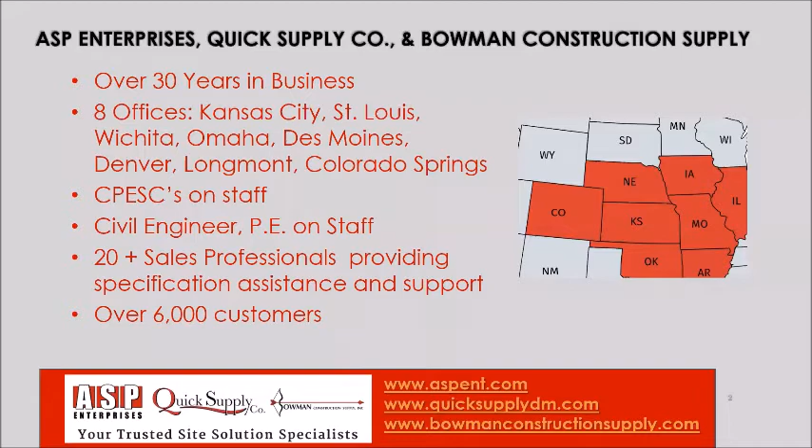Those website links, you'll see those again, but those are great technical resources for you. And probably the most important thing I want to impress upon you is that you can specify with confidence that we have the servicing ability to take care of those projects. We have many trucks all over the region, millions of dollars in inventory sitting in our yards to be ready and able to service all projects, whether it's erosion control, geosynthetics, all the different materials and products and solutions that we offer. Here you can just see some of our inventory, the pictures of our inventory.

This is actually our Kansas City yard, but we have yards like this in all our major markets. And again, on the website, we have some of the best brands in our industry, and all those brands are represented with both specification sheets and installation guides. So our website can be a huge resource for you, and they're also mobile friendly, so wanted to make sure we got that out of the way.

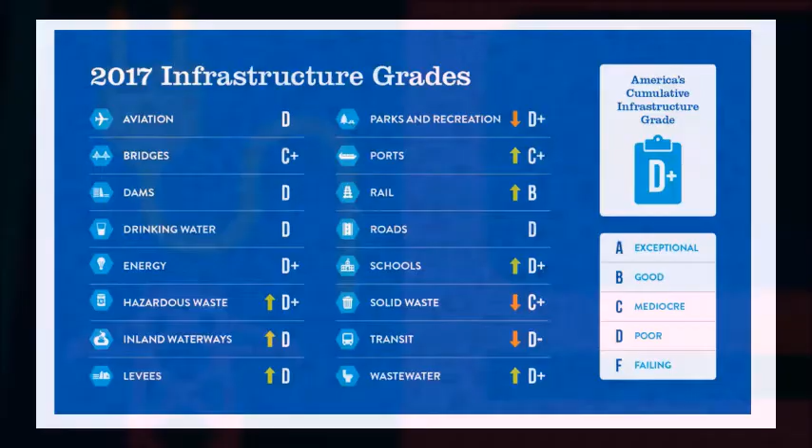And I don't like to read to people, but if you can see on your screen, you'll be able to read these different categories that ASCE measures our infrastructure. There's 16 different groups that get letter grades, and those are just used as indications to try to identify priorities and find out where we have the areas of greatest need.

Anything I show here is not an indictment of civil engineers or anybody else in the construction industry. It's just to identify the problem and then figure out the solution.

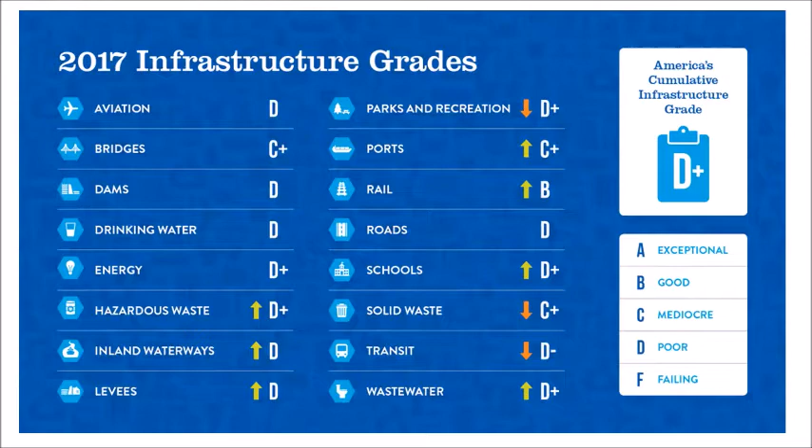One of the things we've learned with this report card is they continue to compare results from one report to the next to see if things are getting better. You'll see no arrow in front of roads. That means the letter grade didn't change from 2013 to 2017, didn't go up, didn't go down. A D is still a D.

That's not an indictment of us, not a criticism of us in the profession. It's just a fact that many, many Americans drive cars every day, and we all know that. So our existing infrastructure is aging, and ongoing repairs just can't keep up with demand yet.

Now with something like what we're experiencing now, there's a lot fewer cars on the road, but this is temporary. We all know what it's going to look like when we get the all clear and this clears up. There's going to be a lot of people back on the road, and we hope to see you all again. But in order to get ahead of this challenge we have to get that letter grade up, we're going to have to really identify what types of things we can do better.

That's what we're doing now, is sharing information, sharing knowledge. When we do a full hour just on our roads, in a room full of engineers or contractors or government agency folks, we can get specific about what cracking is, or which failures you're seeing in your area, whether it be cracking or rutting or raveling.

The fact is, we all see some version of these in one place or another. Certain regions, based on climate and soil conditions and traffic patterns and just the old practices of design and construction of roadways, see some of the cracking more than others.

In the old days of asphalt, flexible pavement, rutting was a real problem with warmer temperatures and soft mixes. So to compensate, the industry overcompensated and went to much stiffer mixes. Rather than rutting being the leading problem in a lot of areas, cracking became the problem as the pendulum swung towards stiffer mixes. So asphalt binder is being asked to do more than it really can. It's being asked to prevent rutting and prevent cracking all at the same time.

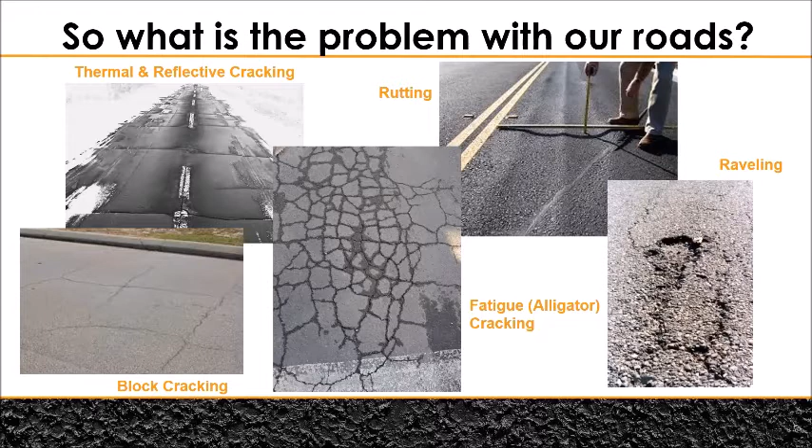What we've seen is no matter how good the design is, or how good the mix is, or how good the base is, eventually all roads are going to crack.

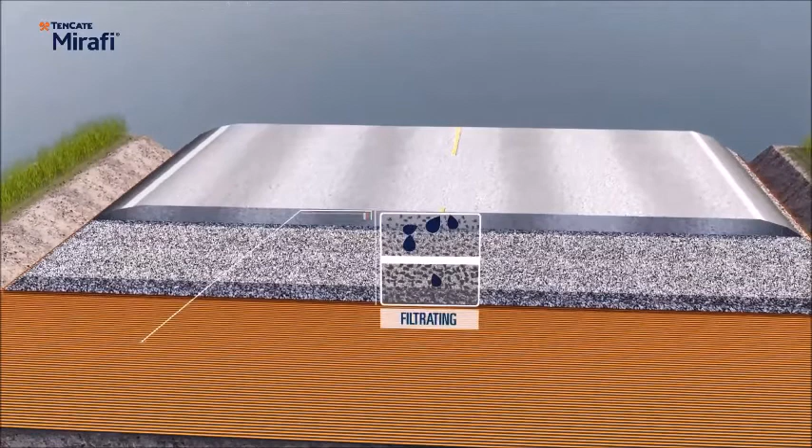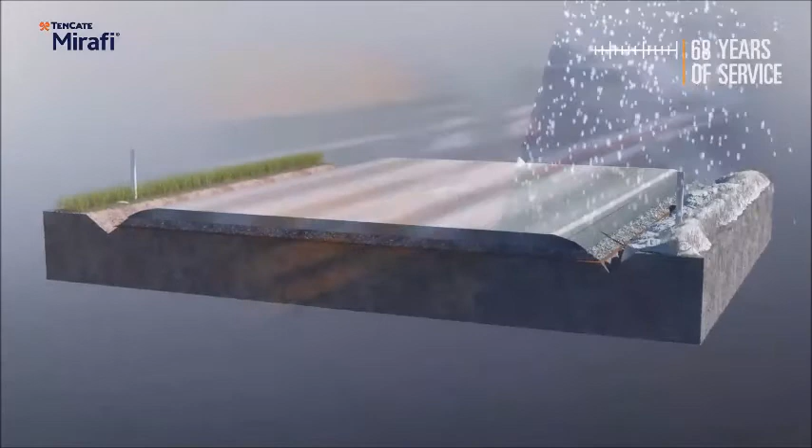Keeping up with today's aging infrastructure can be a daunting task. TenCate Geosynthetics provides sustainable solutions for the improvement of roadways by introducing TenCate Mirafi RSI series. Increasing traffic volumes and ever-changing weather play a role in the deterioration of roadways. Potholes, cracks, and ruts within the pavement cause safety issues, longer drive times, and increased maintenance costs. The TenCate Mirafi RSI series provides a sustainable solution for building longer-lasting roadways with lower economical life cycle costs, allowing a reduction in the use of natural resources, thus saving money and increasing the lifetime of roadways up to 10 times. With the integration of TenCate Mirafi RSI, roadways have proven to be more durable and longer lasting for decades to come. The TenCate Mirafi RSI solution prevents potholes, cracks, and ruts from forming, building smoother, longer lasting roads with lower fuel usage and insurance costs for motorists. Build the best. Specify Mirafi. TenCate. Materials that make a difference.

I love that, it accidentally just loaded up. I had my finger resting there and I was getting excited about teeing up that video for you. I was going to give you a little warning and brief introduction, that sometimes when we get a lot of people on these it slows down the Zoom a little, uses up some capacity. We have 100 registrants on here, and I'm very excited about that. That video on mine was a little choppy with the pictures, but the audio was good except for one part.

I love that video because it's a break from my voice. She sounds much prettier than me, and she's also very efficient with her words and very clear.

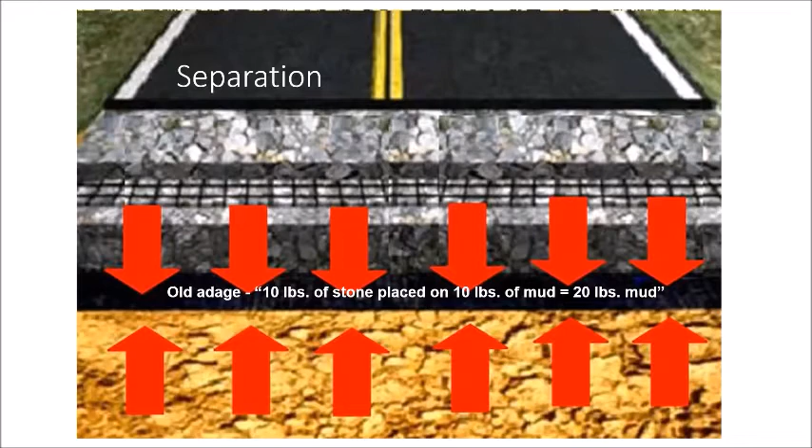There's another little graphic I just popped up, overlaid on this one on purpose so as not to totally cover it. What happened when TenCate came out with this miracle solution, as they called it, the RS580i, was it provided the strength they were getting from geogrids, plus the separation that geogrids alone cannot provide. And why does that matter? We're going to get into that here in a little bit.

One of the things our supplier, TenCate Mirafi, talks about with their RSI series is that you can reduce the amount of rock you need for your rock base. That is true. The other option is to go ahead and use the rock base you were going to use, but now that you've added the RSI, you get a lot more strength and a lot more life out of that pavement, moving towards perpetual pavement.

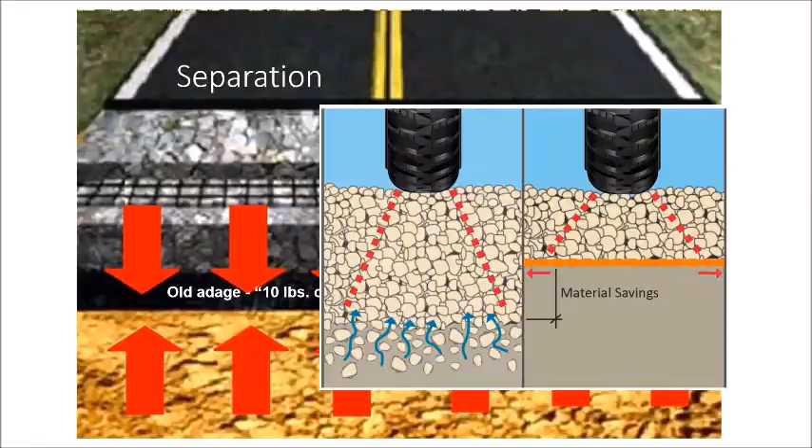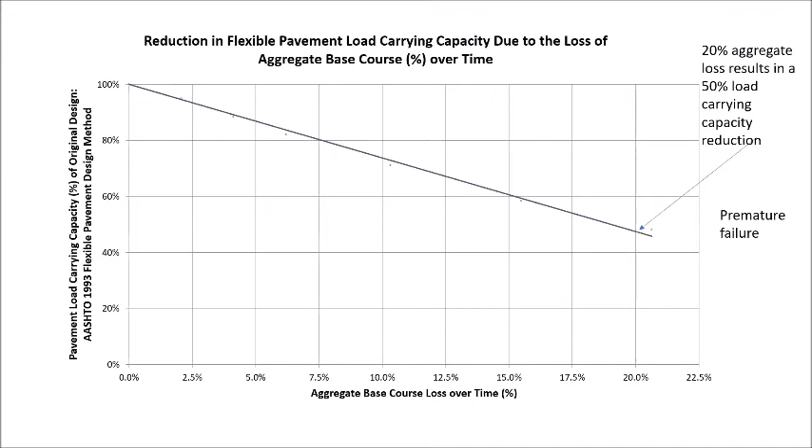I can give you all the research that shows that just losing 20% of your aggregate, which is the mud coming up into the rock or the rock going down into the mud, can cause you to lose 50% of your strength, or load carrying capacity. Think about that for a minute. 20%, it could be just a few inches depending on the thickness of your rock base, and now you've lost 50% of the strength of that rock base that's supposed to support the road. You're going to get premature failure.

RSI brags about 5 different categories for their product series: higher modulus, higher strength, higher water flow filtration, better confinement similar to what geogrids do, and better separation, which we just talked about.

One thing they added that I wasn't sure I fully appreciated more than 5 years ago when I started working with ASP Quick, now Bowman, was product identification. Why does that matter? The little 'i' at the front of the word 'integration' is orange, not black.

If a specifier calls out an RSI product on their plans, they want to defend their spec. They want to make sure if they drive by, they see the right product on the ground. If it's a black geotextile fabric, all of those other geotextile fabrics look the same. You really can't tell the difference. So you want to be careful to defend your spec because all geotextiles are not created equal. They perform differently, they have different characteristics, and we're going to get into that in this next slide.

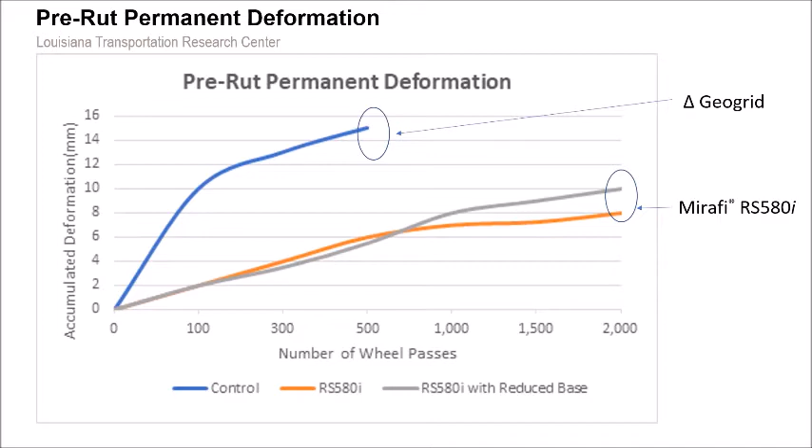Mirafi RS580i shows half of the deformation under the same number of wheel passes, and it continues to get stronger quicker. That's a stress-strain relationship, meaning it doesn't have to stretch before it gets strong, not like the other products on the market. So the Mirafi RSi series is definitely different than everything else.

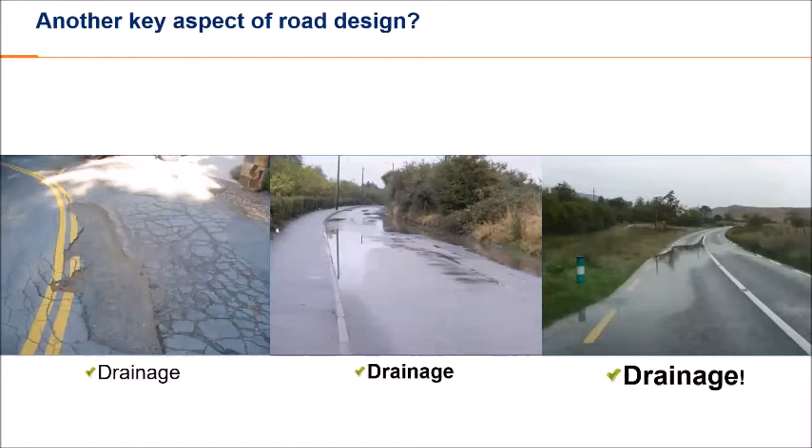It leads us to the biggest problem that engineers and anybody has with roadways. And just like real estate, you're supposed to ask people what are the 3 biggest concerns with pavement: drainage, drainage, drainage. Now, RSI is strong and it's great for soft soils, but it alone isn't a drainage solution by itself. And drainage matters because you're going to get potholes, you're going to have hydroplaning cars, it's a safety issue. And it really does show up with somebody who has old tires, like my kids. They live on a gravel road and they drive old cars.

Safety is an issue. Mirafi used their RSi product, which is super strong.

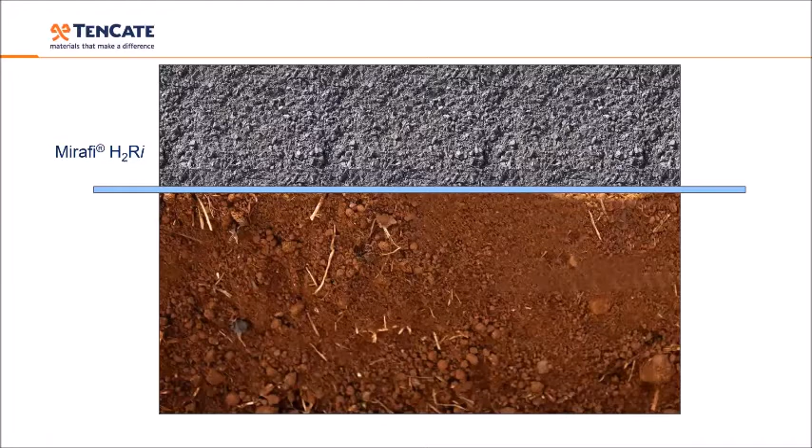This product here creates a capillary break and a drainage layer. So any of the excess moisture in the base is going to come up and hit the Mirafi H2Ri, which is, like I said, as strong as RSI, but it has these little channels in there that actually wick away moisture, similar to an active fitness shirt.

I can't say brand names. What that does is it works like a siphon, rather than work like a drainage layer that operates only due to gravity, which would be out of luck if there was no slope or fall, or out of luck if there was a wrinkle or a fold in that rolled product. H2RI can go up and over any wrinkle or fold or deformation in the base.

The way I narrate it is I grew up in southern Iowa, a poor kid living in the country, and we used to siphon gas out of old trucks and tractors to put into a dirt bike. Once you suck on the hose and get that gas started, it just continues to flow into your container below. I hate to encourage you to siphon gas, especially in tough economic times.

Gas is cheap, so don't do it. I'm just saying this works like a siphon, and this is fantastic because in the past this was a concern that all designers had. If they had a drainage layer, they had to make sure it was installed perfectly - there can't be any wrinkles or folds, or it wouldn't drain.

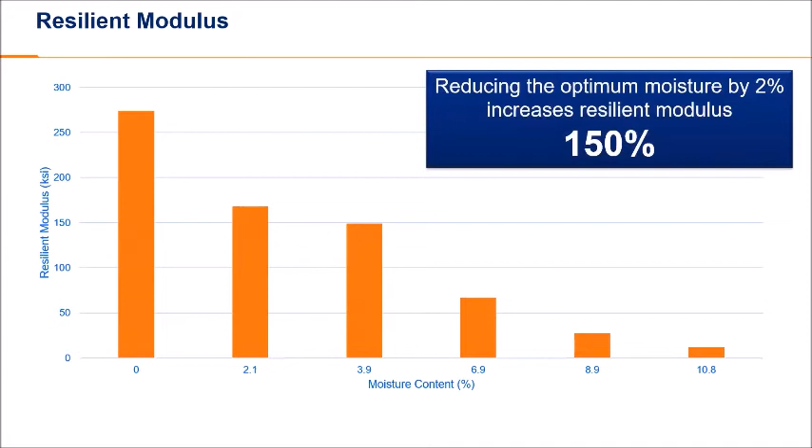The research shows that just by changing it by 2%, you can increase the resilient modulus, which is going to make your road stronger and last longer, by 150%. So a little bit of an investment up front in putting down a better base now can lead to a much better road section. This is like building a cake - everything sits on top of the sub base, then the base, then the pavement. So another way to say it is if you reduce the optimum moisture by 2%, it decreases the pavement deformation by more than 50%.

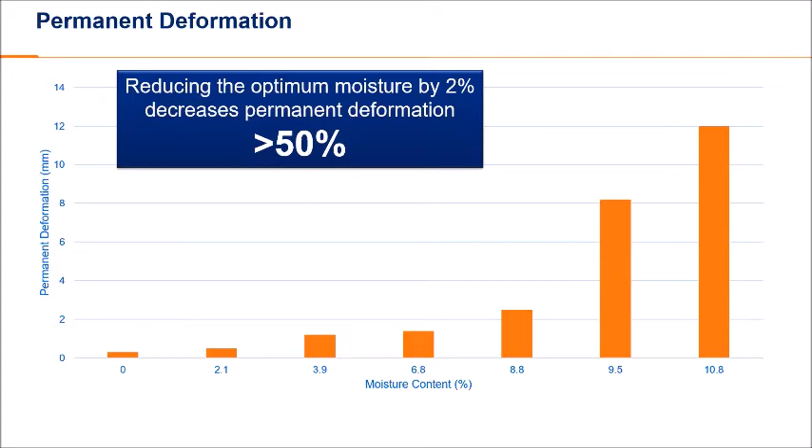This really first appeared on ice road truckers in Alaska, and they did a lot of research on roads up there because they have tremendous fluctuation in the amount of moisture they get in their soil and in their road base.

So while we still talk about it as a new technology, it's because it's becoming new to be embraced in a larger market, not just in Alaska. MoDOT has already used it on some bridge approaches. A lot of organizations that we deal with on a regular basis have already started using it for their wettest areas - they might use RSI on the rest of the roadway, but on a really wet section, they could use H2RI.

In this example, they daylighted it out to the shoulder. I've talked to a friend of mine that works for a big engineering firm here that does a lot of design for the DOT, and he would talk about rolling that down to a lateral drainage tile. Instead of exposing it, have a lateral drainage tile running the length of the roadway. That's another option.

So if we've improved our base and made it last longer, and achieved what we want to call perpetual aggregate base, now if we're going to do the next layer in the cake, we're going to have to go with the pavement above it.

Before I hand this over, I want to reiterate something. There's only so much budget to fix these roads. This isn't an indictment on any of us that we're getting a D on our roads. The fact is we have to take that limited budget and figure out how to spend it.

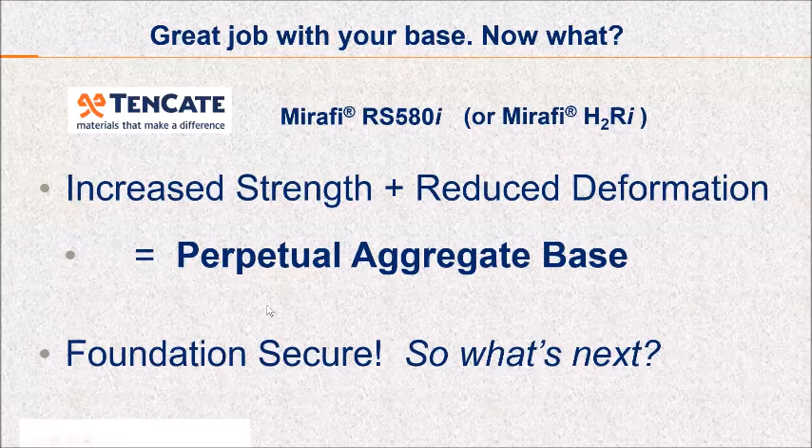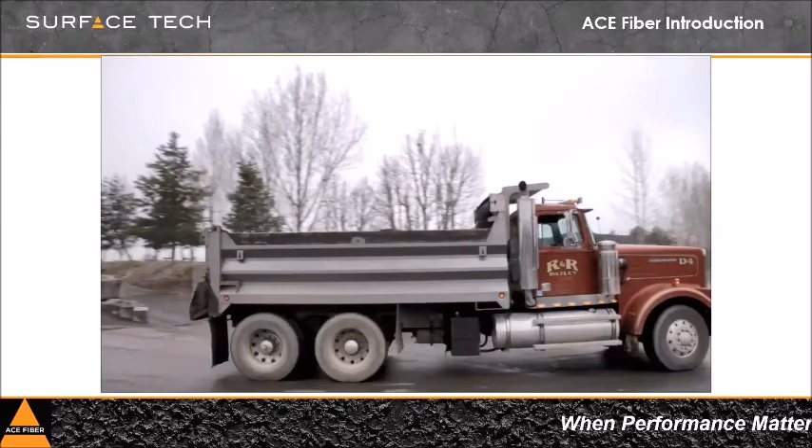Surface Tech, a global leader in innovative additive solutions for the asphalt and concrete industries, proudly introduces Ace Fiber. Ace Fiber, a frac solution, is an Aramid Kevlar fiber additive with a unique delivery system.

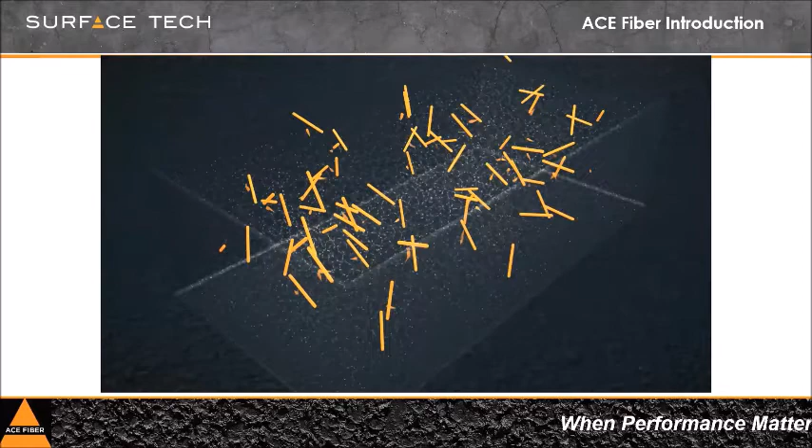The Aramid is coated with a Sasobit wax that efficiently controls the fiber into the hot or warm mix, then burns off, leaving the Aramid to properly disperse.

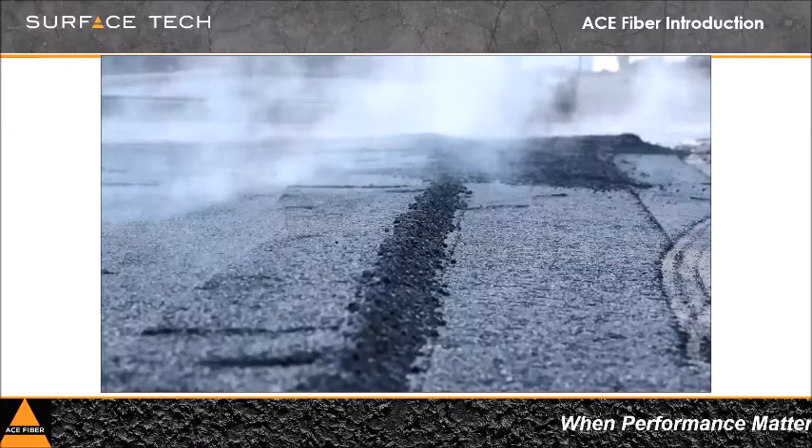As for performance, Ace Fiber delivers a dramatic life expectancy increase while significantly reducing rutting and cracking. It also provides a value proposition for those seeking to reduce the control thickness and maintain or exceed control standards.

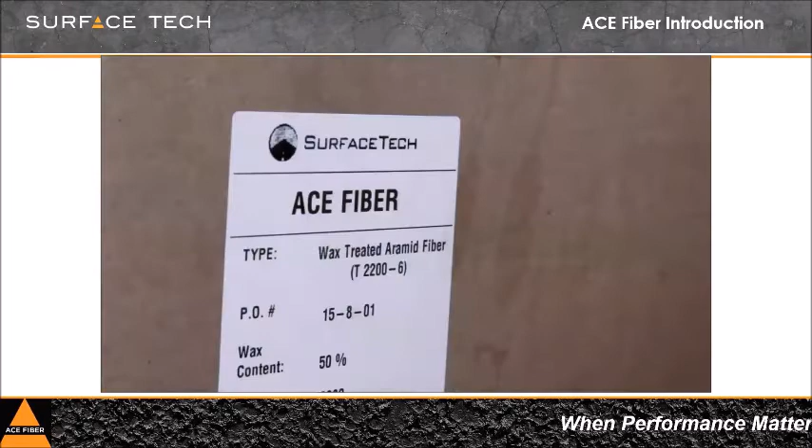As part of Surface Tech's ongoing support and to provide professional peace of mind for every job, an accredited geotech engineer will oversee your plant mix on the days of the job for an add-on fee. Depending on the size or complexity of the job, the engineer will either provide a hand mix or oversee a machine-fed mix into your contractor's plant process.

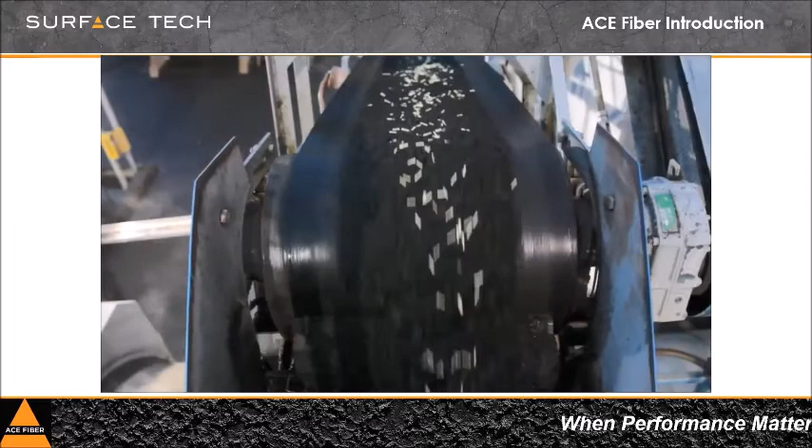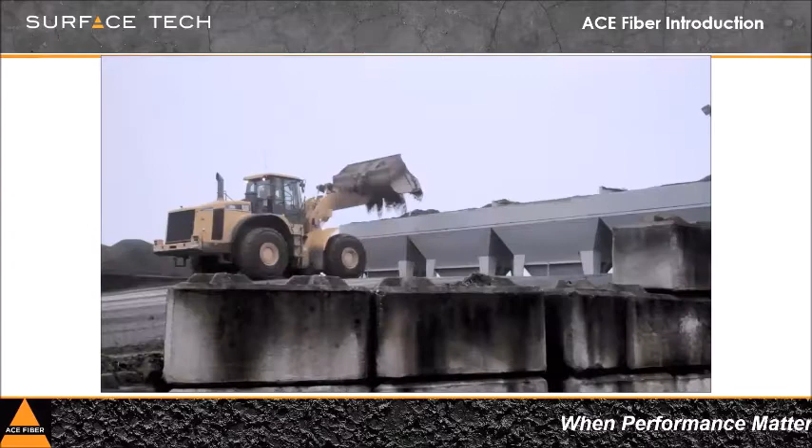In most cases, ACE will be introduced onto the RAP belt or directly machine-fed into the mix hopper. The proper dosage is pre-calibrated and fed based on the job specs and plant's rate of speed for the job. Afterwards, a PE certification for the proper mix will be promptly provided by the mixing geotech engineer of record.

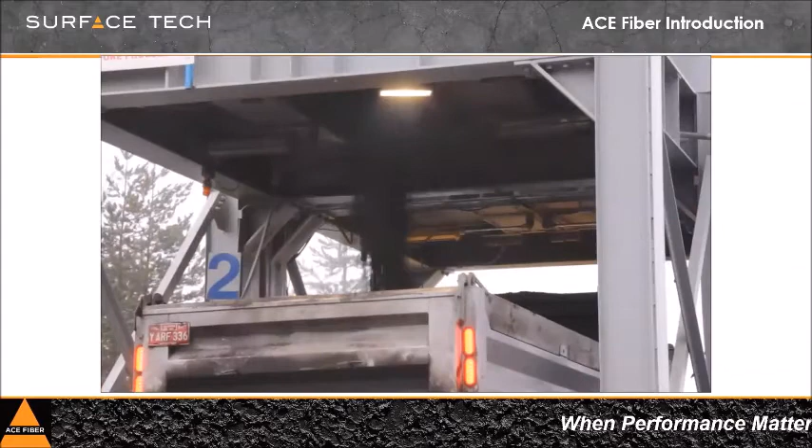Further, the adoption process for both plant mix and field installation is seamless. Nothing is required to change in existing contractor protocols. This is a significant feature in that most new technologies require a change in process, not with ACE.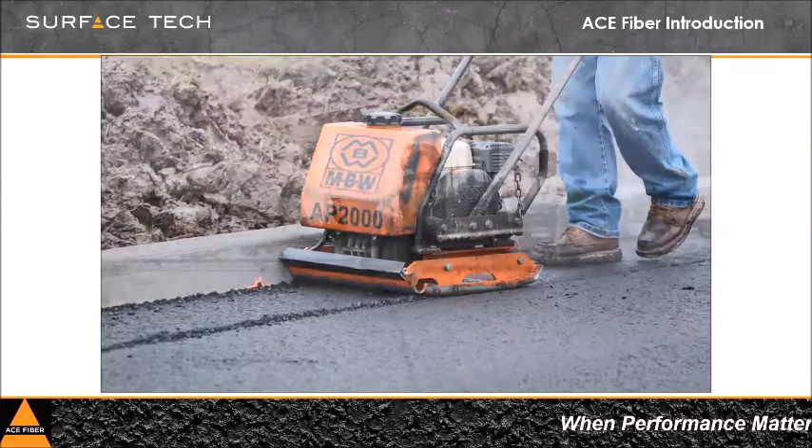Once mixed, the hot or warm mix asphalt will perform without any change to protocols for the paving contractor as far as installation is concerned. Raking is superior, as is the ease of spread and workability of the asphalt.

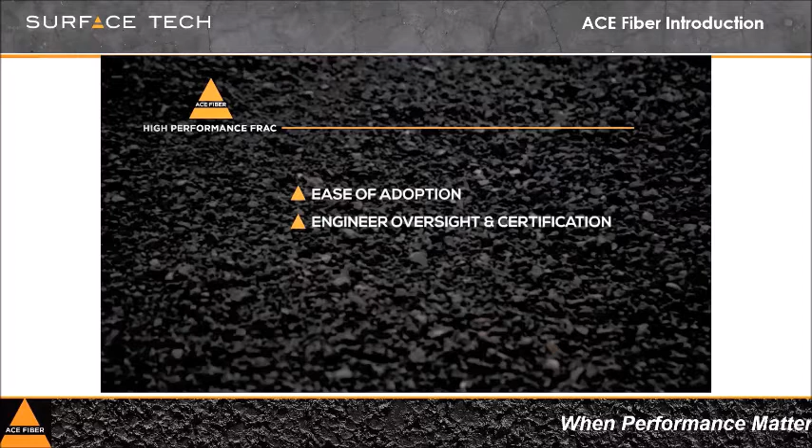So in conclusion, consider our superior benefits: ease of adoption, engineer oversight and certification, installation performance, and low cost. This is a green solution that pays for itself while delivering superior results for all that use and depend on the finished product.

So let's get into the Ace Fiber part. For those of you not familiar with Aramid fiber, it's a mixture of 2.1 ounces of fiber, 2.1 ounces of wax. We have bundles that are 3/4 inch and 1.5 inches long. You get approximately 10,000 fibers per bundle and about 19 million fibers per ton of asphalt. You can see the center picture, the coated fiber. At 170 degrees, it starts to melt, and at 190, it's totally soluble in the mix.

Now, sasobit has been used for years in warm mix. It's not enough sasobit wax to actually change the mix design. You don't have to change any of the binder. So it's a nice chemical, a nice compound to be able to add into the mix, but you're not adding any chemicals or plastics that could do any harm to the mix.

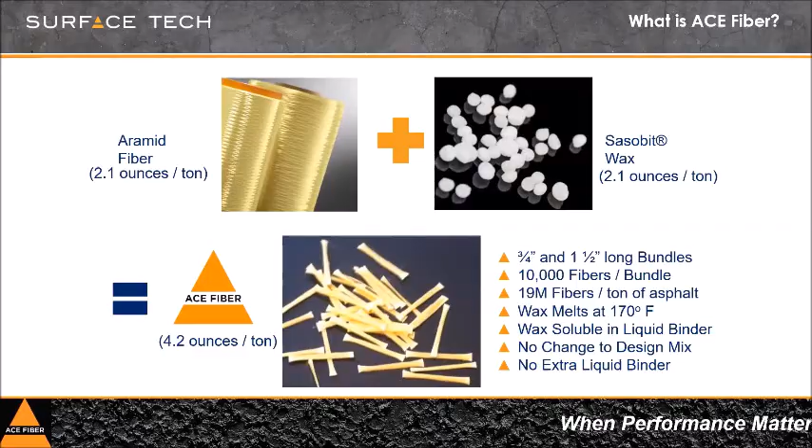Other fibers have been used. Cellulose fiber is a very common one. Just to show a little contrast, cellulose fiber is used for absorption — for curb mix, for mixes that have to travel a long way. It holds oil, so you can increase your oil content and get mix that doesn't stiffen over time. Aramid is not that type of fiber, so there's a lot of misconception about the two.

Aramid is actually a fiber that is going to add strength. It's going to add cracking and rutting resistance. So there's a difference between the fibers people use, and this is a newer fiber being used in hot mix.

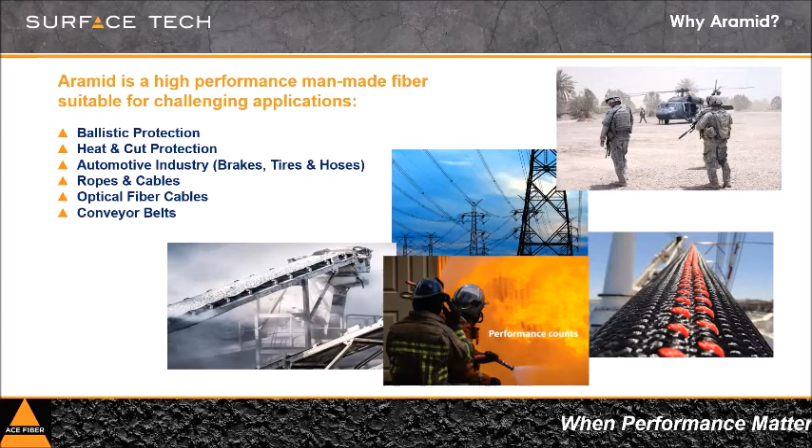So what is Aramid actually? Aramid is a manufactured fiber. It's used for ballistic protection, for fire, police, military — replacing high strength steel with a lightweight Aramid. Aramid also goes by the name Kevlar. Aramid is the actual fiber that makes up Kevlar.

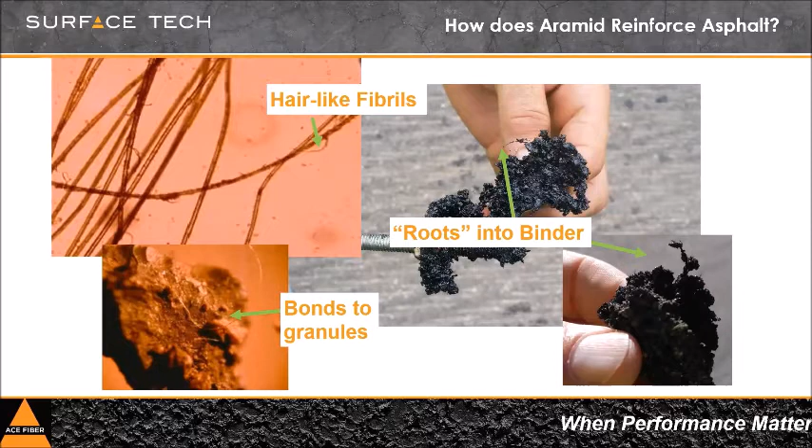So as you can see in the asphalt, these hair-like fibrils under a microscope — you can see the tiny fibers rooting in the binder. Before, the only bond was the liquid AC, the black asphalt cement you see there. But now you have an actual fiber intertwining between all the pieces of aggregate, binding that aggregate together.

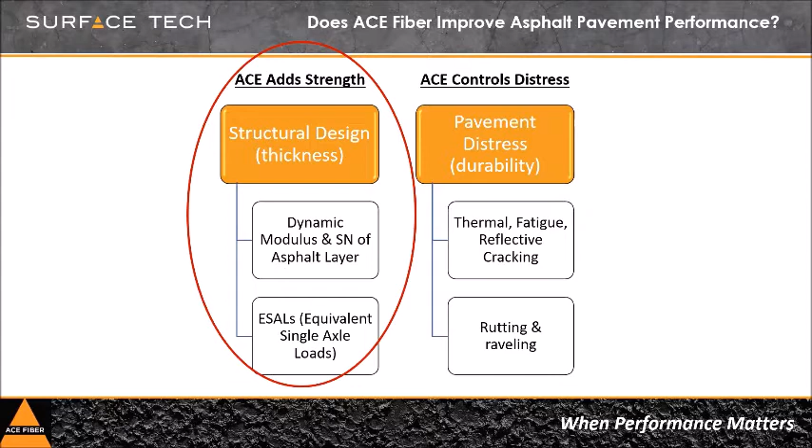So we're going to talk about a few things today about what fiber does. We're going to talk about adding strength, which we'll get into in a second, and later on, how it controls distress — helping with cracking and rutting. So anything we talk about today goes back to the core values of Ace Fiber: strength, and cracking and rutting resistance. That might be on a quiz later, just so you know.

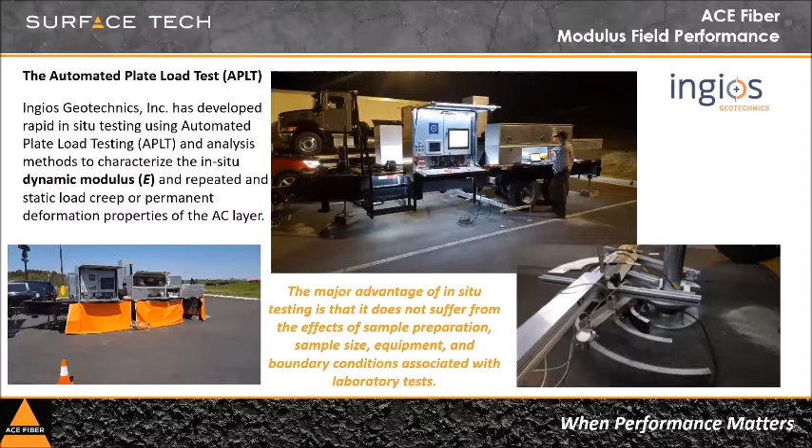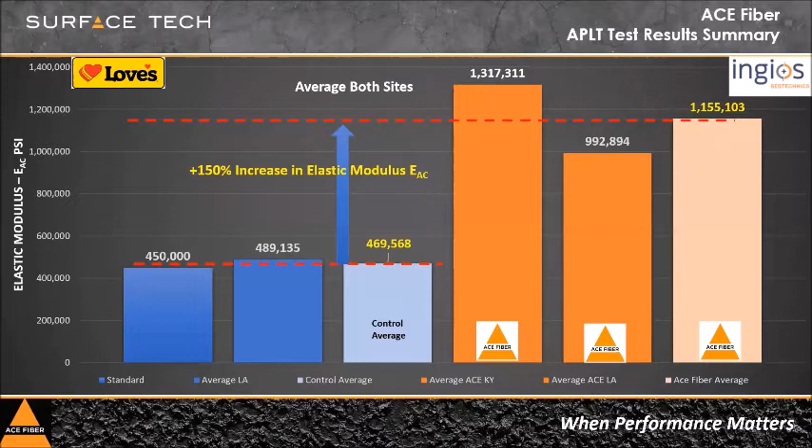So this is the automated plate load test we'll use today to talk a bit about strength. On the left-hand side is a control section without fiber. On the right-hand side, for these next couple of charts, there will be a fiber section. So on this one, you see a 150% increase in elastic modulus.

All these projects are done at a Love's Travel Center. We have a national account with Love's for all new asphalt that they use. They're still using concrete around the pumps, but all the asphalt on their parking surfaces is filled with fiber now. So you can see a 40% increase in the layer coefficient and a 328% increase in your ESAL count.

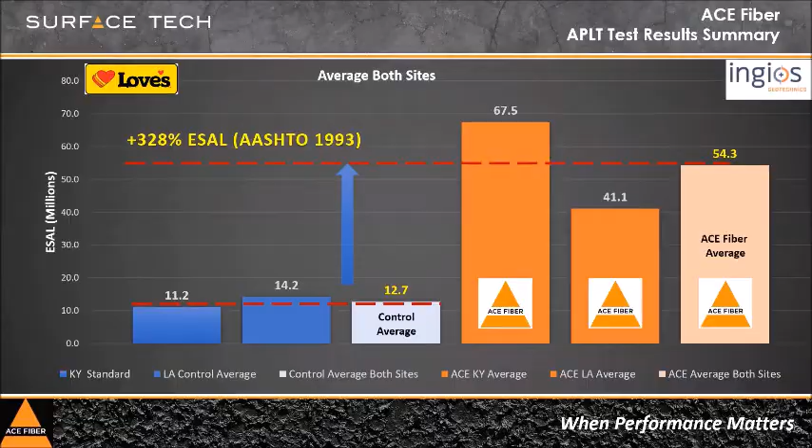So you can see on the left-hand side, we're talking about adding strength. We have increases of 150%, 40%, and anywhere from 100 to 500% increase in ESALs.

Now, what are your most common signs of pavement failure? As Bill already showed, I think everybody's roads in some way, shape, or form look like this. You have your rutting, your raveling, your fatigue, your block cracking, your thermal reflective cracking. Everybody's roads aren't getting the same mix or the same oil, so every road is getting worse and worse. After every overlay, it just continues to get worse.

So now we're going to switch sides. We talked about strength. Now we're going to talk about controlling distresses, how fiber helps with rutting and with cracking. So this is a simple PG chart.

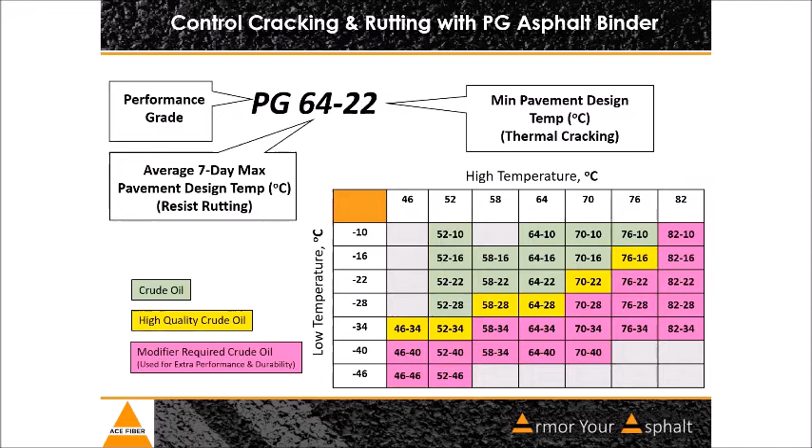Everybody's using about a 64-22, at least here in St. Louis. Some areas go higher, some go lower. But when you add fiber to your mix, your 64-22 is going to perform like a 70-28 or a 76-28. Now you can change your binder, you can put polymers in it, but no matter what you do, you're never going to have a product like this that helps with strength and adds rutting and cracking resistance.

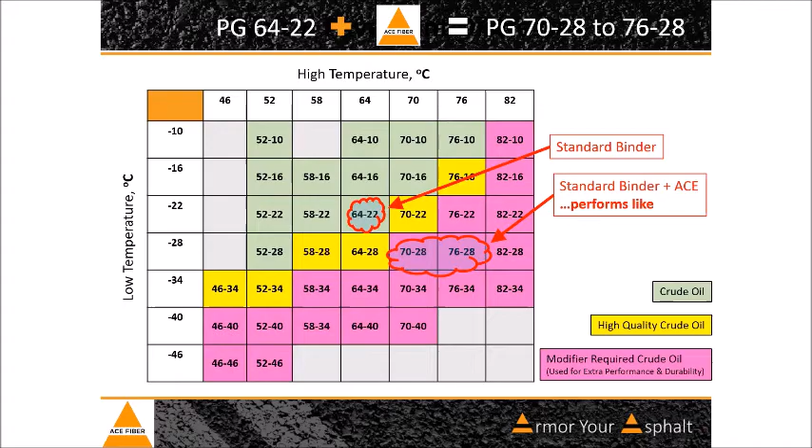No matter what polymers you're putting in, no matter what you're changing, you're not going to get anything unless you put fiber in. So here's a number of tests that we have.

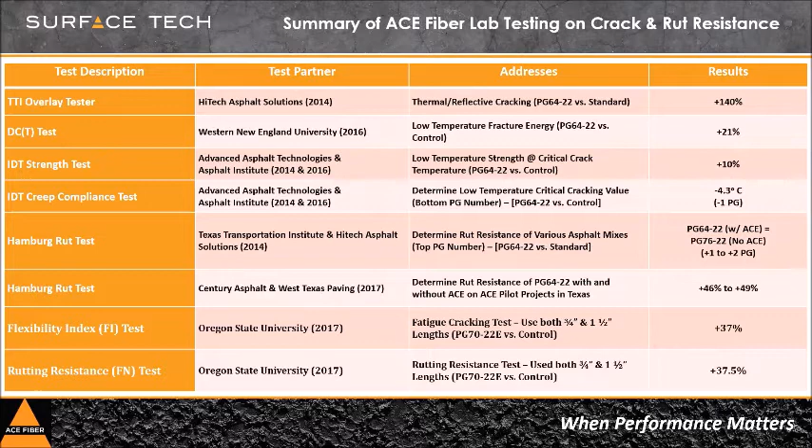We have all this information we can make available to you. We'll give another presentation if we're all under quarantine still, or we can come into your office and do a lunch and learn, or just send you an email with all of our testing. We have a number of tests out there, and it would take all day to go through them, but we have those available for you.

So kind of going back, showing all the increases, the added benefits of fiber in all of your mixes. You can see there all the added benefits of using fiber.

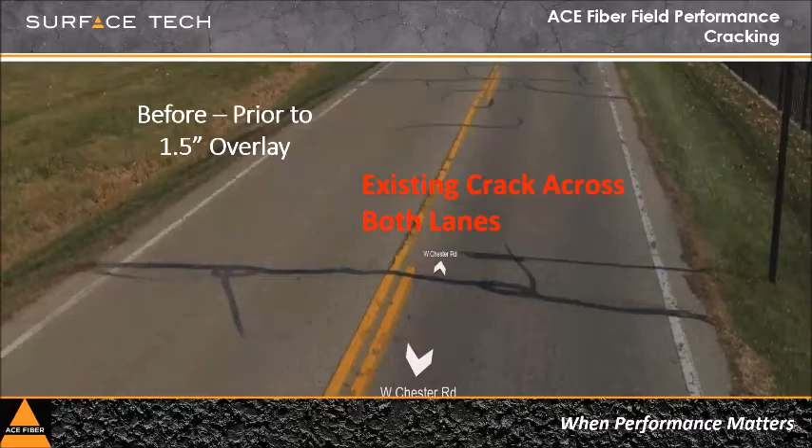Now here's a little something to break it up a bit. This is an overlay test section that was done before the 1.5-inch overlay. You still have to go through and do all your crack filling—you're not changing that—but you can see the crack going all the way across the road.

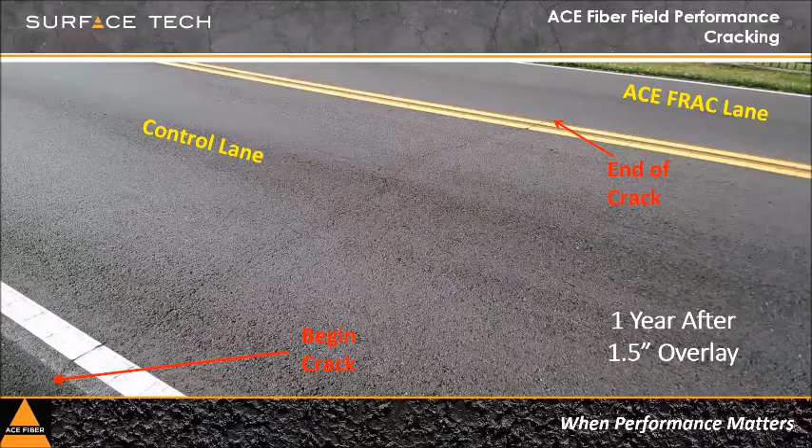Once they did the 1.5-inch overlay, you have your control lane here on the near side of the screen. You can see your crack begins right on the shoulder and goes all the way to the center line. Right there, you can see it coming and stopping right where the ACE section begins.

Now, after 1 year, we came back and looked at it. We had 13 cracks return on the control side, and only 1 came back on the ACE side, and that was up against the bridge. So you're taking a flexible pavement and putting it up against a rigid surface, where you're going to have cracks and issues with your road anyway.

So we'll go through just 2 of the tests that are widely accepted: the Ideal CT and the Hamburg rut test. Both of these are helping towards your balanced mix design.

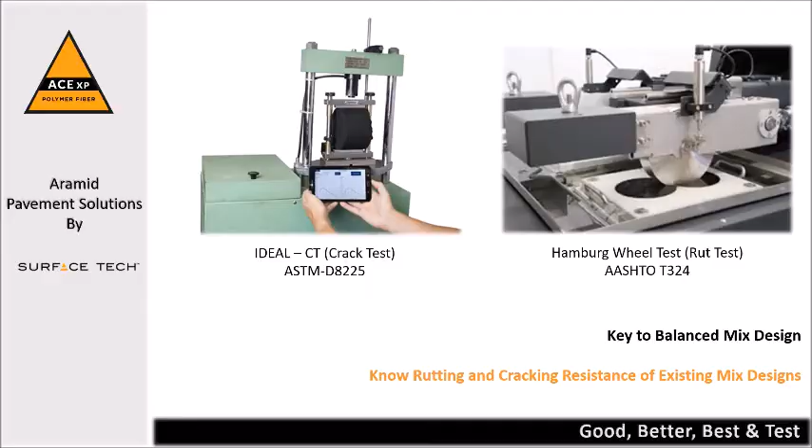So the first one we'll go through is the Ideal CT. This is becoming more widely accepted from state to state. It is a repeatable index test. Most asphalt labs on site or independent labs have this machine. It's a repeatable test—you can do it throughout the course of the day, take samples, and test your cracking. One of the big things about this is that it's an inexpensive test, one that can be done on site. A lot of asphalt plants have this test in place and are able to use it throughout their asphalt design.

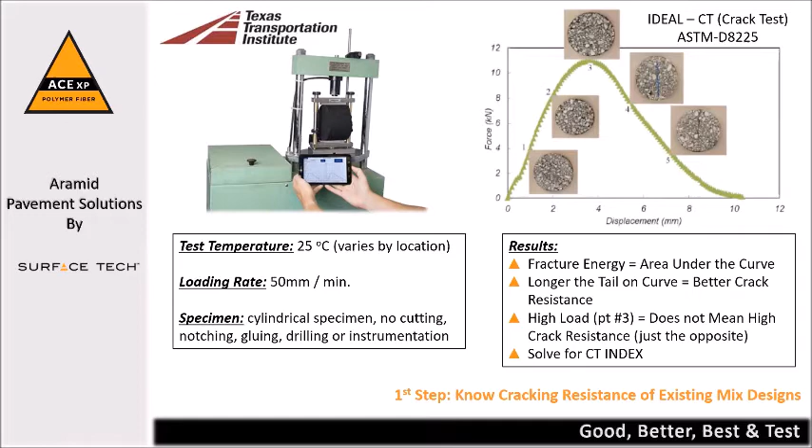Next we'll go through the Hamburg test. I've been quarantined for a week, so a hamburger sounds really good, so we'll call it that today. But it's actually a water bath test.

They take little pucks, run a simulated wheel over it, and then you check your rut depth.

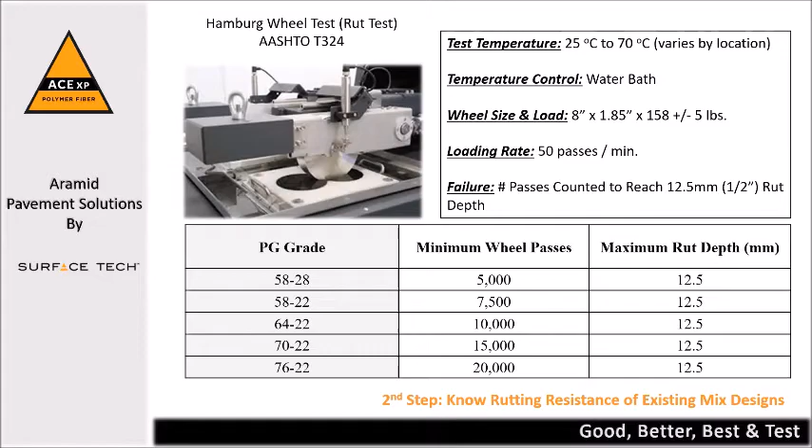Not every road is the same. As Bill talked about the subgrade, you're looking at all different roads that can have a disaster of problems - you can look at concrete overlays. A single dose is not going to be your answer every single time, and ACE fiber is not going to be your answer every single time. Sometimes full depth reclamation or a completely new road is the answer, but we do have other options - a good, better, best. We can do testing on the road to know what our best option is going to be.

This was done for one of our projects with Missouri DOT. We did the Hamburg testing and the ideal CT afterwards, done by the testing facility at Mizzou. On the left-hand side, we have a 47% increase from the control lane to the fiber lane, testing that asphalt and showing better crack resistance.

On the right-hand side, you can see the rut depth. Higher on the chart is not necessarily better. The blue side is 5,000 passes with the wheel, and the orange side is 10,000 passes. At 10,000 passes, you're getting a 14.2 millimeter rut depth versus 4.8. So you can really see the added benefit of fiber in your rutting.

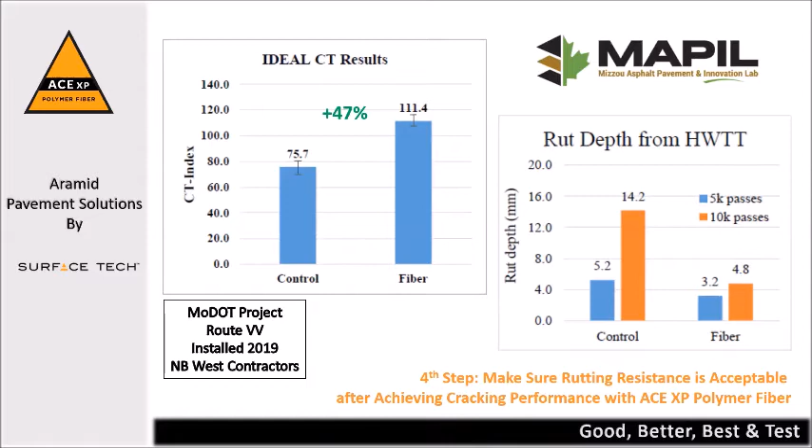With all these tests and all these added benefits, you're really achieving a balanced mix design - added cracking resistance, added rut resistance, and added strength.

Now, how do you get it in? Here's my specialty - I swore I'd never go back into asphalt, and here I am.

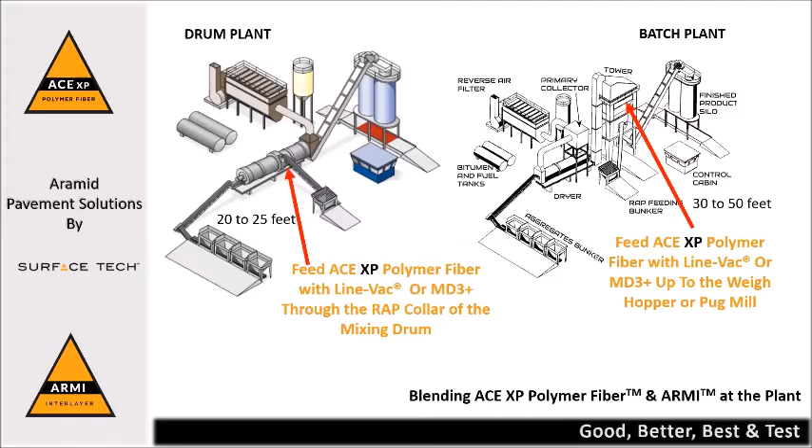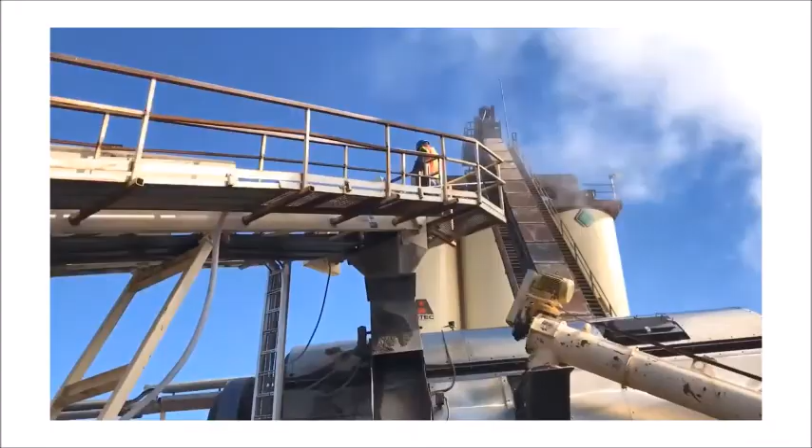Here's a video of our machine, the MD3. We have all the fiber in the hopper, going down into the pans, with sensors metering it out. It doses out the 4.2 ounces and drops it in. There's our Line-Vac - it goes through our 2-inch hose all the way up, and our tech is at the top making sure it's coming out the other end, going right into the weigh hopper to be introduced into the mix.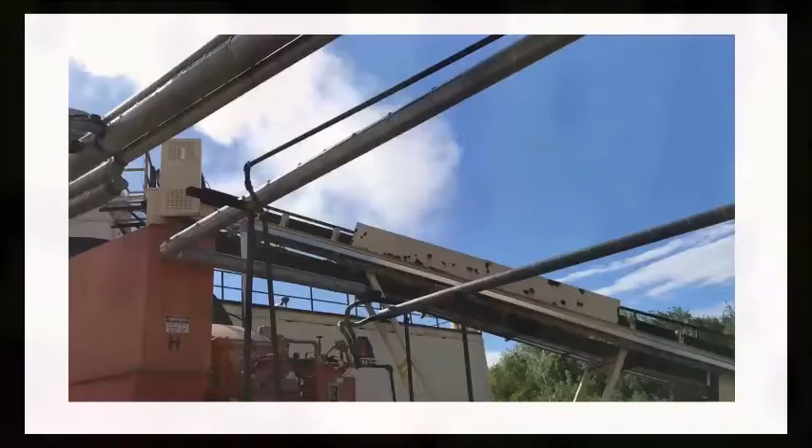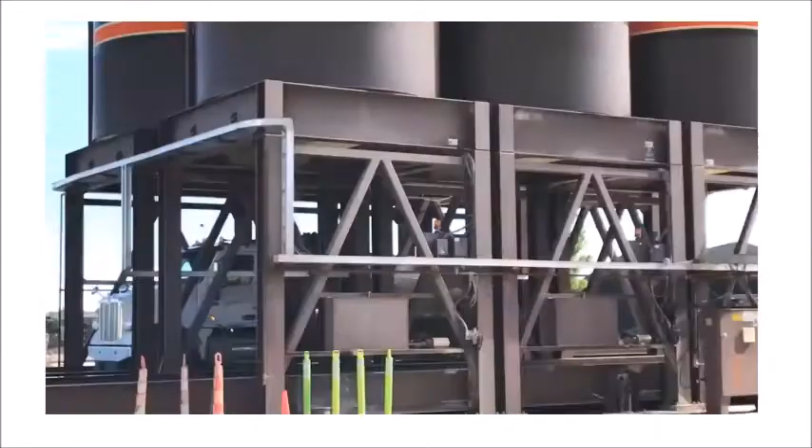Once it's up there at 170 to 190 degrees, the wax is totally melted off, and those little sticks blow apart like dandelions. In this one, you can see our drum - it's already been introduced into the mix, made, going up into the silo, down through the silo, and into the truck. So you can see the whole process of asphalt being made with fiber.

Then on the job, the crews don't even notice the difference with the mix - they just see it going in, with no fiber sticking out. We have our people on site on the jobs checking everything out.

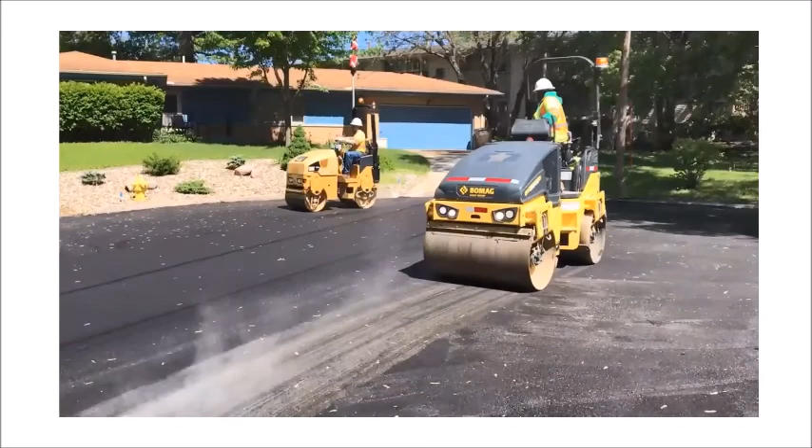And then here you go, in place. One thing that all the roller operators have said is they achieve compaction in fewer passes with the fiber in the mix than without, so it's less labor time for the rollers, and that roadway is opening up that much sooner.

And then finally, you can see some fiber in the mix. That's the way you're going to see it. You'll see it on the end of rakes, on the end of shovels. You can pick up some clumps of it and see the fiber, but the fiber just doesn't stick out. It's not changing the color of the road.

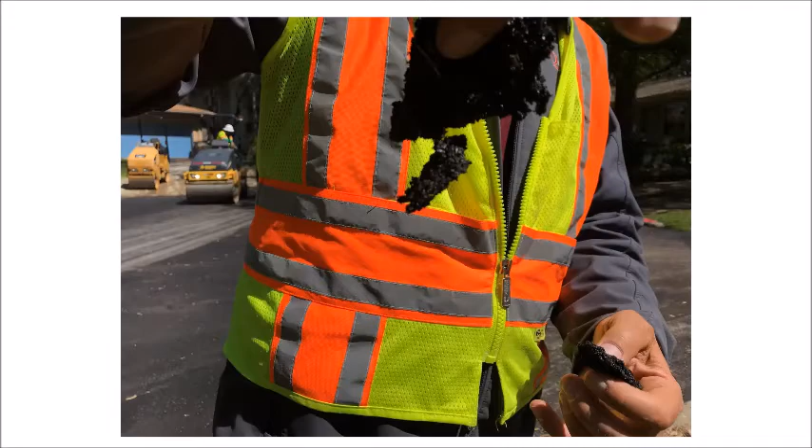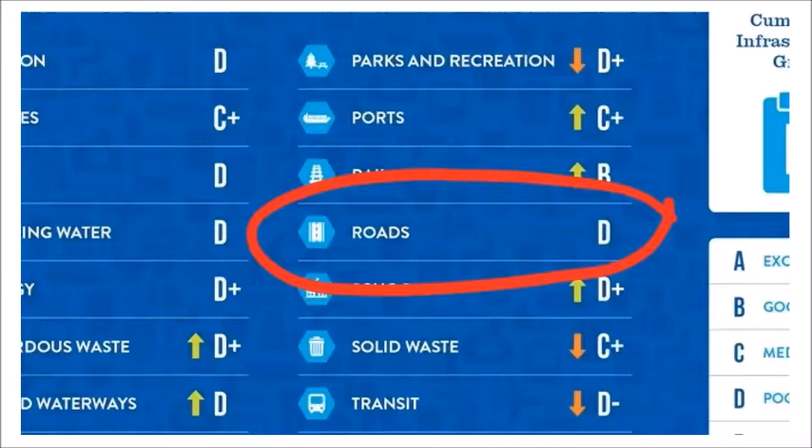All right, Bill. Bill? Yeah, that's great. I had somebody coming in here, a truck driver, wanting me to help him unload a truck. So sorry, everybody, this is real world. We really are working, we're open and ready for business. So sorry about that, nice guy. I wish I could have helped him.

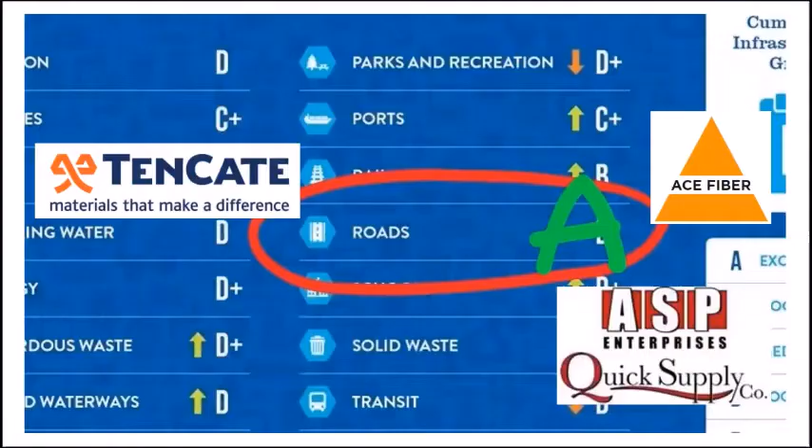Thank you, Alexi. Don, you jumped right to this slide. That's okay, or did I do that? Let's go back, where we're getting ahead here. Where are we at? Yeah, let's go back a couple of slides. I was going to wrap something up here.

Sorry guys, one of the things I want to make sure I didn't gloss over in talking about RS580i and H2RI is that H2RI was specifically invented to make sure they're draining off those really, really wet areas. I had said I know of a couple projects with H2RI in Missouri, and I went and checked those while Alexi was giving his presentation. Before I was asked to unload this truck, I went and looked at our case studies.

Jeff Chambers asked a question, and I know you guys are all muted so you can't hear each other, but he asked a question through the Q&A, and I answered it in a way that you should all be able to see. But this is our first Zoom webinar, so if not, I'll go ahead and ask and answer it since we're doing great on time, thanks to Don and Alexi keeping us going. He asked which projects MoDOT used H2RI on, and one in particular is the Boone Bridge.

That's down in St. Louis County. And if this is the Jeff Chambers from MoDOT, he should be in that same area, so he won't have to go very far. He can sneak out of his quarantine and drive by and look at the project, but he's not going to see the product. H2RI is going to be buried, and the only thing he'll know is if that base is holding up well because it's being properly drained with H2RI.

The other projects I specifically thought of were a public library and a bridge in St. Joe, and several others that use the RS580i, and I can share those case studies as well. If you imagine a construction site that's graded out and they're getting ready to start compacting the layers of the sub base, and it's wet or soft, you've seen some of those projects where equipment gets stuck in the mud. That's where this solution comes in.

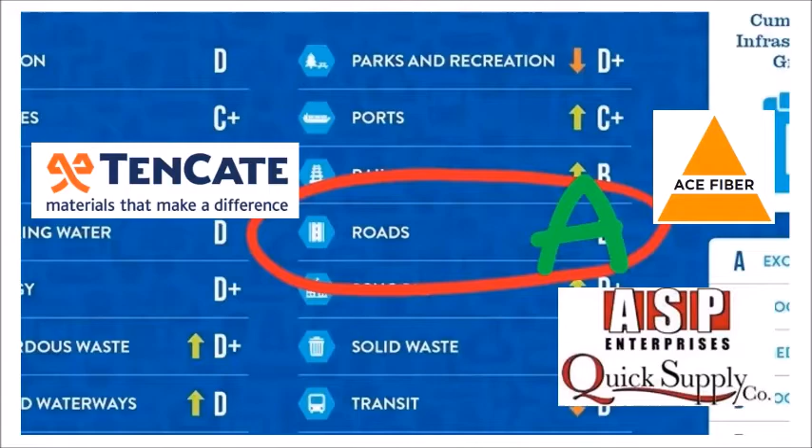So we're going to shoot to get better grades. Can't tell you who that kid is, but I have legal permission from his mom and him that I can use that picture. Our question is, how can we expect them to do well on their report cards if we don't do better on ours?

So let's make our roads last longer. Let's just quit kicking the can down the road. Let's do a better job of using these perpetual solutions that can help us move on to other classifications of the road. Every county engineer, state engineer, even city engineer has a map, and they classify their priorities A, B, and C. When they have enough money, they can do all of A, B, and C, but when money's short, they got to keep going back to those same priority roads. If they make those priority roads last longer, they can start to get to some of those other roads.

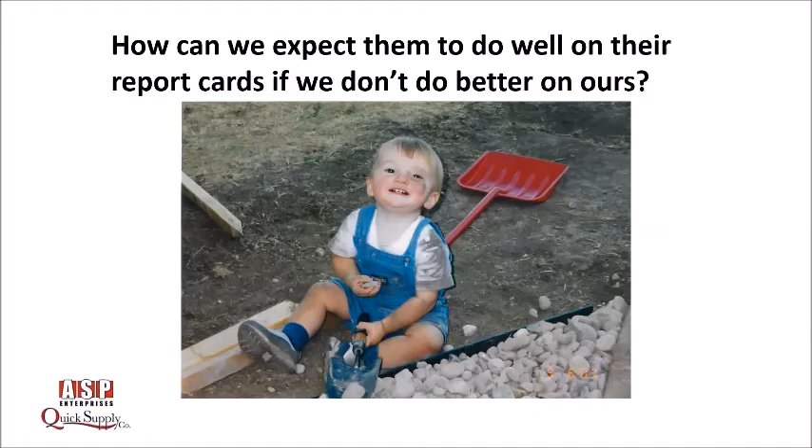And I think you're going to win something out of this. When this all frees up and clears up, I think somebody ought to buy you a sandwich.

If you can't accept a sandwich because you work for the DOT, we'll buy one, and we'll sit there and watch you eat yours. So thank you for that question.

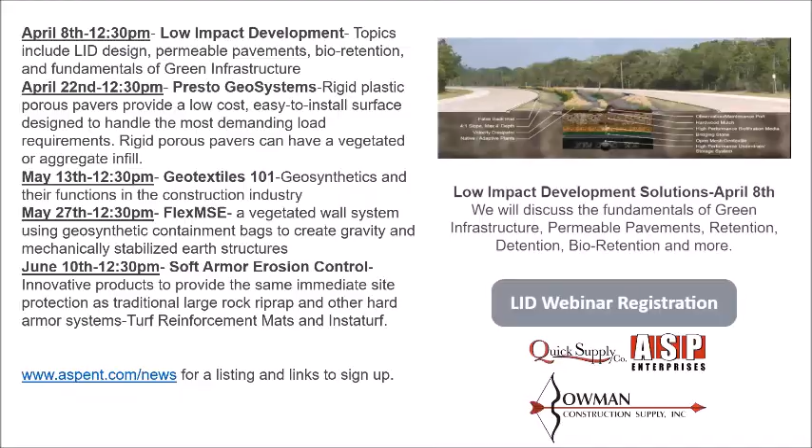I just want to say thanks to everybody for doing this. I know it's a difficult time for all of us. I love that we can stay connected like this. I hope you all stay safe, and I'm really looking forward to seeing most of you, if not all of you, in person someday soon.

Reach out to us, we'd love to hear from you. Thank you, good job Donna. Alexa, do you have anything? The same goes for me - I appreciate everybody taking the time. I know it's kind of hectic right now, but let us know if we can jump back on and give another presentation, or if there's somebody that wasn't on today that you think would like to hear us, let us know. Thank you.